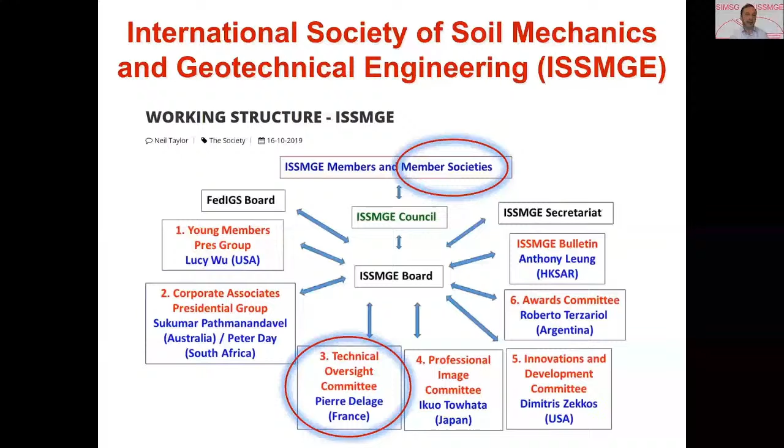This is where I would like to mention that if you visit the website of ISSMGE, you will find a good listing under committees and technical committees. These various committees take part in the technical matters related to soil mechanics and geotechnical engineering.

The Transportation Geotechnics Committee, having a history of just about two decades or so, was established as an applications committee. Because of that, it deals a lot with applications of geotechnical engineering in transportation fields.

As part of the technical composition, the members come from many different member societies, a total of 31 countries, about 80 members listed and suggested by these countries. So we cover a lot of member societies. As you can see in this pie chart, the 80 members come from various parts of the world, with 24 members coming from the Asia region, where India belongs.

These are all the countries listed here, including India, where we actually have 24 members from 8 countries. In India, we have Professor Shahu from IIT Delhi, Mr. Ravi Sundaram from Cengrs, Dr. Vasant Havanagi from CRRI, and several other friends on the TC202 committee representing transportation geotechnics.

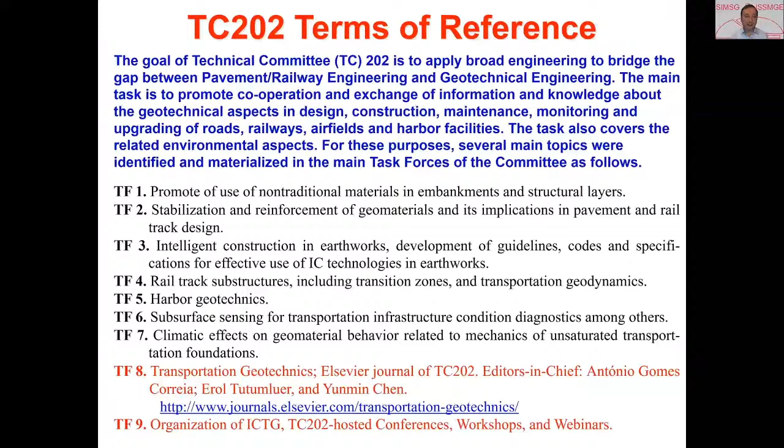That is a lot of the activities that our committee does in terms of hosting conferences, doing workshops and symposia, as well as webinars, and especially a dedicated ISSMGE conference for our technical committee 202, which you will see is the International Conference on Transportation Geotechnics.

Here is the cover page picture of our journal called Transportation Geotechnics. It was certainly a new journal when, in 2014, my very first year as chairperson of the committee, we started with the first issue in that first quarter of 2014.

In addition to myself, Professor Antonio Gomes Correia from Portugal and Professor Yunmin Chen from China are co-editors-in-chief of this journal. Now, since 2019, the journal is in the Science Citation Index, and we expect to receive your original articles to be published in this journal.

The 9th item I mentioned is our International Conference on Transportation Geotechnics. Associated with that, ISSMGE has given us a named lecture series to select the most prominent speakers to give Proctor lectures. The very first Proctor lecture was delivered by Professor Buddhima Indraratna from University of Wollongong.

Now he's with University of Technology Sydney. The second lecture was delivered by our own Professor Antonio Gomes Correia, our past chair, who organized and hosted the 3rd International Conference on Transportation Geotechnics in Portugal in 2016.

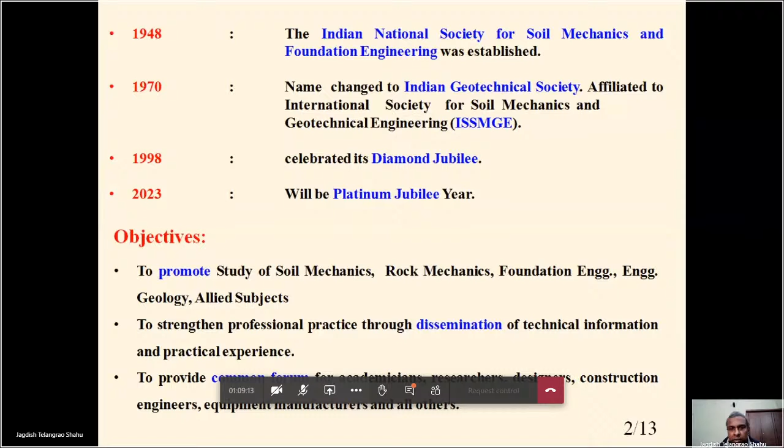If you see the membership, various categories of membership exist, but the most common is the life membership. Presently we are one of the largest societies as far as numbers are concerned. This number has increased to more than 5,000 members, and these are all mostly life members. Our membership fee ranges from 8,000 to 12,000 rupees, depending upon the age. With that, we get a lot of benefits.

For example, in conferences, if you attend, you will get a concession, and there are many other benefits which I will highlight soon. We have local chapters spread all over the country, and through these local chapters we organize conferences, seminars, symposiums, workshops and other things. Presently we have not less than 48 local chapters.

We organize the Indian Young Geotechnical Engineers Conference, where students and PhD scholars participate in masses, held once every 2 years. In this conference, placement opportunities are also presented, and best paper awards are given. If you get a best paper award, it becomes a great highlight of your biodata.

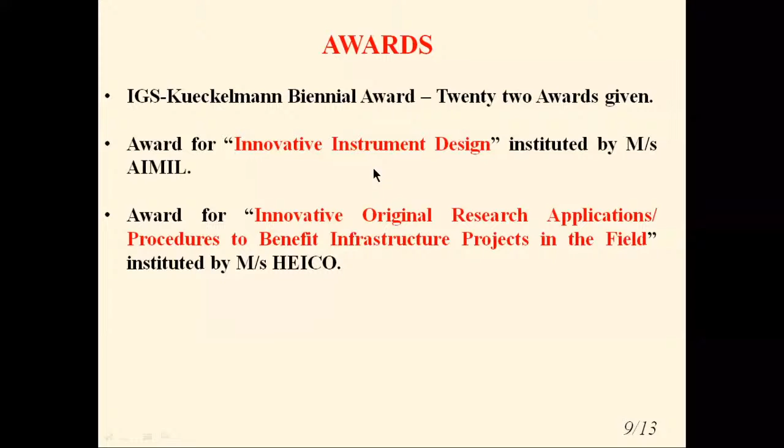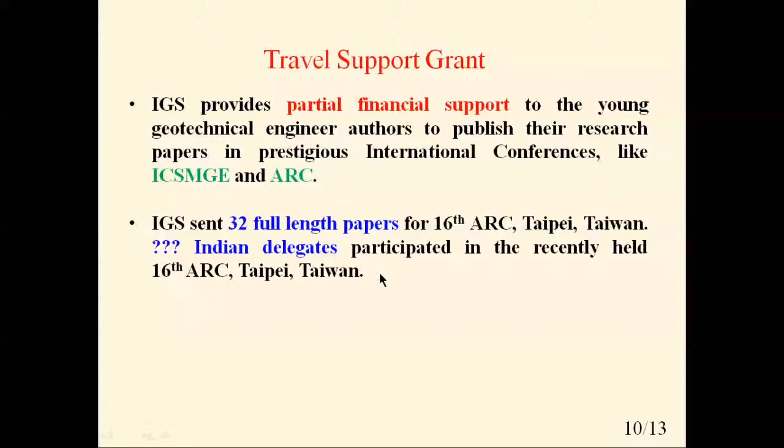Besides that, IGS also gives travel support grants to young geotechnical engineers to publish their research papers in prestigious international conferences like ICSMGE and ARC. Recently there was the 16th ARC conference, and we had sent 32 full-length papers, and I think more than 32 Indian delegates participated in the conference. Besides that, we also have a prestigious IGS annual lecture which is delivered every year.

Going forward, IGS now has a vibrant web portal. We have instituted an online voting system and an online membership drive also. You can just go to our website - type Indian Geotechnical Society, Delhi, and you will get the URL. You can click and go there, fill up the form, and get the online membership very easily. We have a student membership category also, and student chapters also. Several student chapters were recently formed.

Thank you, I'm stopping this presentation now and coming back. So with that, I wish all the best and dissemination of knowledge to the delegates during the next days from 1st to 5th December. Thank you very much.

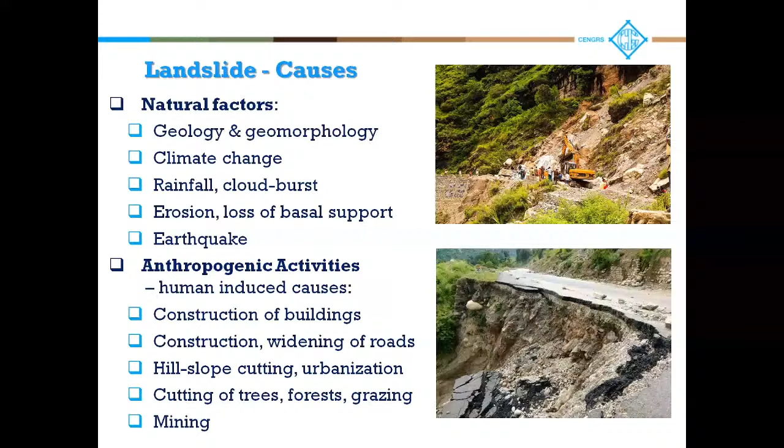As far as human-induced causes are concerned, these include construction of buildings and roads, hill slope cutting, urbanization, cutting of trees and forests. Even grazing can sometimes cause landslides because if animals graze in an uncontrolled way, eating the grass cover, it leads to erosion. And then, of course, there's mining.

Let us see the impact of landslides on society. There is economic decline and losses. It causes blockage of highways and rail tracks. This could result in loss of connectivity to higher reaches, loss in trade and business, and lack of supplies. The cost of rehabilitation involves major government expenditure, so that is another big impact on society. And there's the decimation and destruction of infrastructure, like damage to roads, railways, communication lines, leisure destinations, buildings, etc.

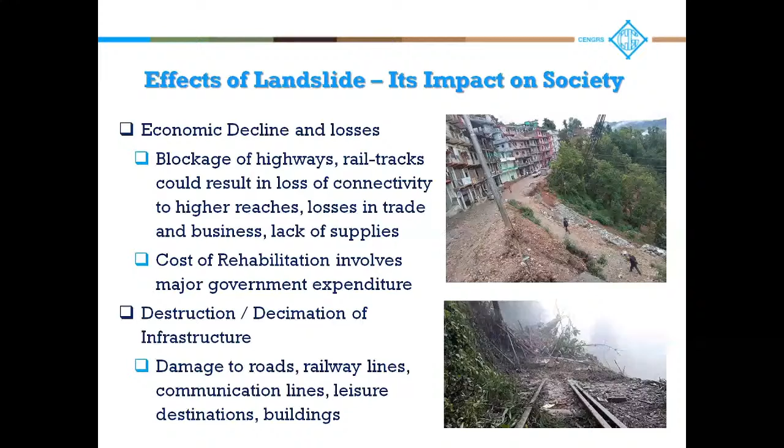Then there's the loss of life, which is the biggest issue. Communities living at the foothills are at risk. The debris could cause death of many people on impact. It impacts river ecosystems, as debris falling into the river can block the natural flow of the river. Waterlogging of upstream areas can occur, and flash floods can happen in downstream areas.

The distress to the population at the upper reaches is a big issue because the areas may get disconnected and relief activities get affected. Of course, the utility and beauty of the landscapes is also affected.

It affects the agriculture and land use. Social impact is there. Erosion of soil and boulders piles up and leaves behind an ugly and unsightly landscape.

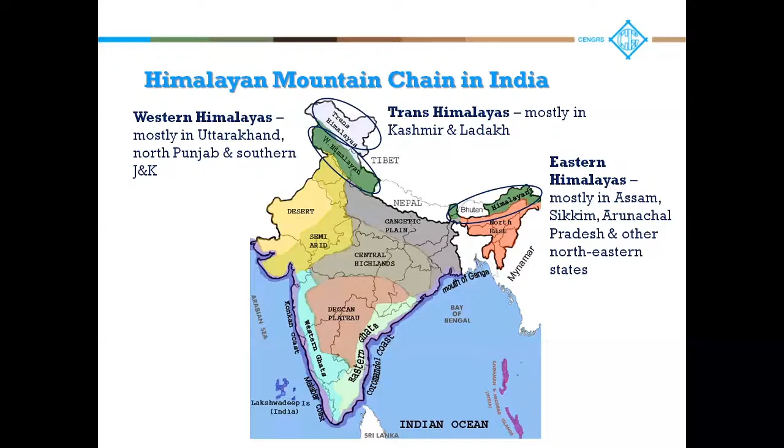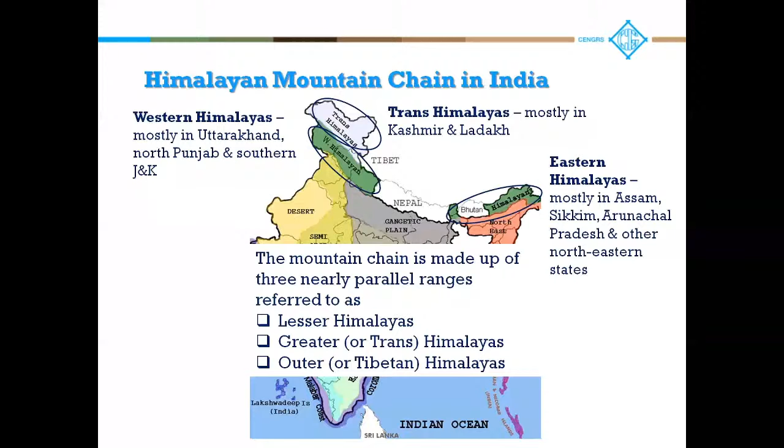So the mountain chain is made up of three nearly parallel ranges, referred to as the Lesser Himalayas, the Greater Himalayas, or the Outer Himalayas.

Let us see the hazards in the Himalayan ecosystem. The avalanches at higher altitudes are a big issue. Then, of course, earthquakes, landslides, flash floods, cloudbursts, soil erosion, forest fires. This you see in the Greater Himalayas as well as the Lesser Himalayas.

This is the river flash flood which caused the destruction of Kedarnath. There is a cloudburst.

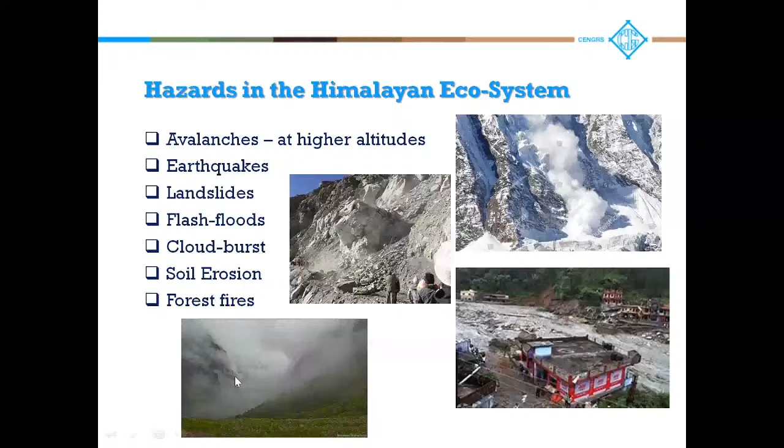The Himalayan mountain chain is one of the most unique geological features on Earth. Its rough topography is a product of a collision between the Indian plate and the Eurasian plate. The tectonic activities in this area make it interesting and challenging for the geotechnical engineer.

During monsoons, as well as seismic events, landslides occur along roads, hilly villages, and towns, causing large-scale devastation and destruction.

The fragile slopes of the Lesser Himalayas are prone to landslides, and an interplay of several forces trigger them. Geotechnical configuration of the rocks and large level variations make the rock mass inherently unstable and vulnerable to movement. Heavy rain and seepage through the jointed mass can play havoc on the stability of the region.

The balance between environmental protection and infrastructure development has always been a dilemma for engineers, sociologists, and town planners.

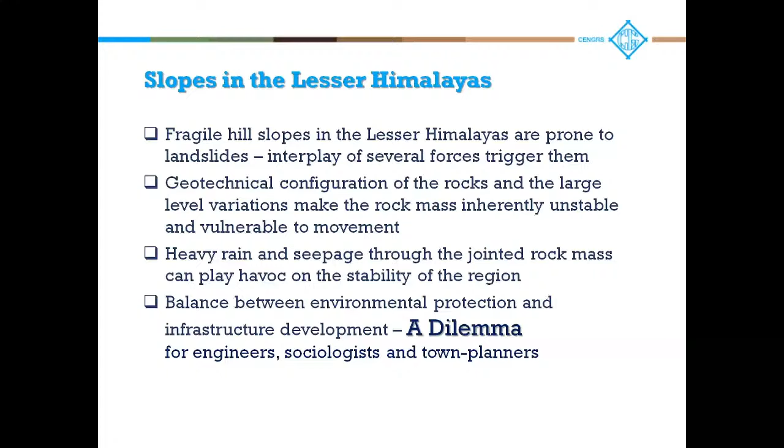There is a need for assessment of slopes in Uttarakhand for restoring environment with sustainable socio-economic development. Geotechnical assessment is a prerequisite.

Several highways in this area are under continual threat of a variety of slope failures. Over several decades, frequent mass movement phenomena have been a major hindrance to ongoing traffic.

Endeavor has been made by several geotechnical engineers and researchers to assess the stability of cut slopes, particularly along highways and roads connecting the various tourist and pilgrim destinations. These studies have, to quite an extent, helped understand the problem, and geotechnical engineers have suggested various remedial measures.

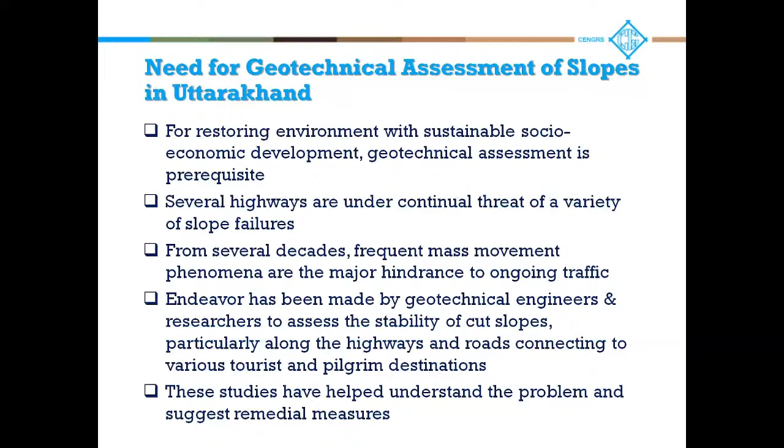Consequences of landslides in the Lesser Himalayas in Uttarakhand are particularly hazardous if they occur along transportation corridors near townships.

Uttarakhand is very well known for its ecological diversity and richness, along with massive tourism and religious activities. Natural hazards like earthquakes, cloudbursts, landslides, floods, lightning, and forest fires are of major concern. The occurrence of any such event is catastrophic, and impacts are manifold, particularly when one event triggers another.

Salient features of the Himalayan landslides: the landslides in the Himalayan region are not of very large scale, usually local failures of shallow depth. Recurring landslides are significantly more common in the Himalayas, particularly in highly fractured and sheared rock mass and soft-hard rock alterations.

Climatic factors become operative when sufficient weathered and disintegrated materials are generated, which are brought down by heavy downpour. Though monsoon rains begin in June, the devastating landslides mostly take place in August and September.

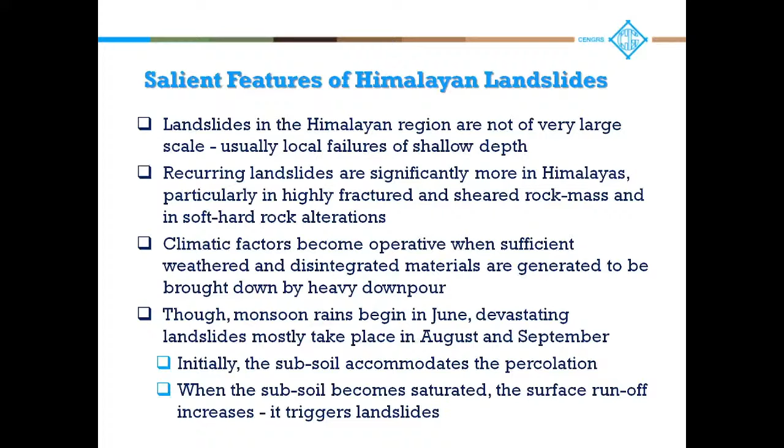Initially, the subsoil accommodates the percolation. When the subsoil becomes saturated, the surface runoff increases and triggers a landslide. The earlier rains weaken the slope-forming materials, while the later rains trigger the landslide.

But cloudbursts are different. They could cause a landslide in the first instance itself due to heavy precipitation. When the fissures and joint planes in the rock dip into the hill relief, that is, you have an unfavorable dip, fractures open up along the river valleys, and this could cause failure. But when the dip of the fissures is favorable, slip rarely occurs.

Most landslides in the Himalayas are triggered by anthropogenic interferences like construction of buildings, roads, dams, etc.

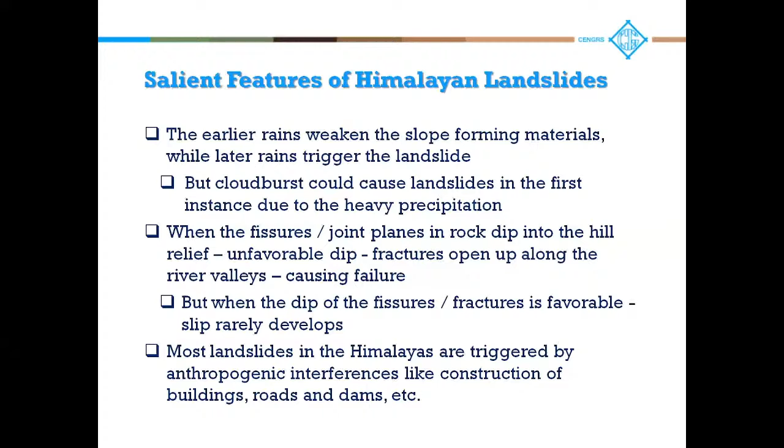I'm now going to talk about a cloudburst that happened in June 2013. This triggered several landslides along the Rudraprayag Badrinath section of NH58. Over 1,000 landslides, major and minor, have been recorded along this alignment after this cloudburst event.

The highway is of distinct importance because of destinations of pilgrim and tourist importance like Badrinath, Hemkund Sahib, Valley of Flowers, and Auli.

Let's understand what's a cloudburst. A cloudburst is an extreme quantum of precipitation within a short period of time. Meteorologists say that rainfall from a cloudburst is usually showered with a fall rate exceeding 100 mm per hour, usually more than 20 mm within a few minutes.

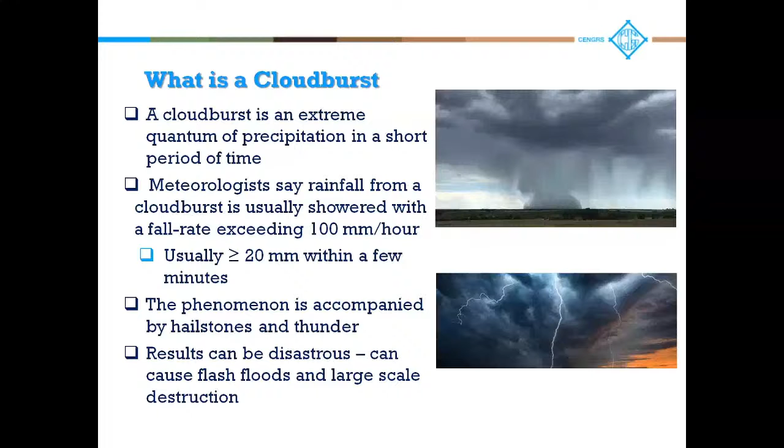This phenomenon is accompanied by hailstones and thunder. Results can be disastrous, causing flash floods and large-scale destruction.

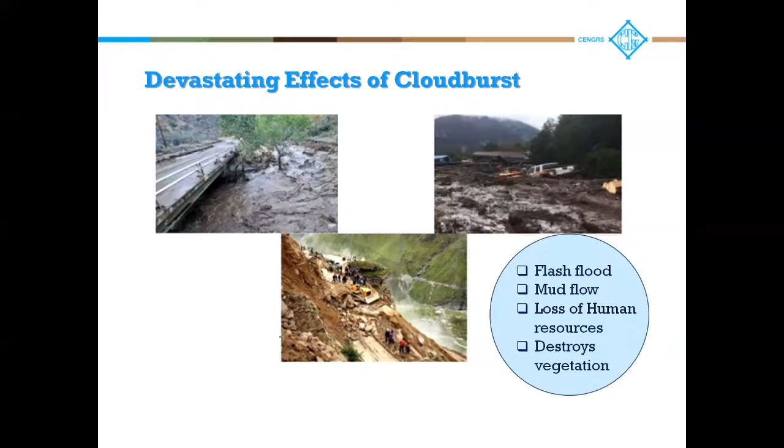So let's see the devastating effects of the cloudburst. You have flash floods, mud flow, loss of human resources. It destroys vegetation to a very large extent.

This study included geotechnical investigation, evaluation of the landslide, and implementing remedial measures at the following locations along NH58: Nandprayag, Maithana, Birahi, Gulabkoti, Helang, Govindghat 2 and 3.

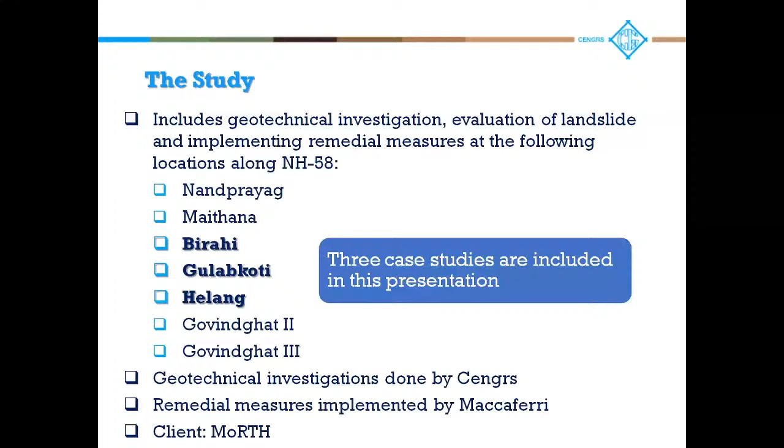This geotechnical investigation project was done by Cengrs, and the remedial measures were implemented by Maccaferri. I acknowledge the contribution of Maccaferri to this work. The client was MoRTH. So in this presentation, I'm presenting three case studies of Birahi, Gulabkoti, and Helang.

The scope covers the landslide area, geotechnical investigation, including boreholes and seismic refraction tests, then geotechnical characterization of the landslides, and engineering solutions were developed to mitigate the distress and ensure safety of the highway. The main contribution in this has been from Maccaferri.

So I'll be talking about Birahi, Gulabkoti, and Helang. The geological setting of this area belongs to the Lesser Himalayas, the central crystalline group. It lies in a tectonic fore-deep, sandwiched between the North Almora thrust and the main central thrust. It has a rugged topography, highly jointed, fractured quartzite, dolostones, and mylonites.

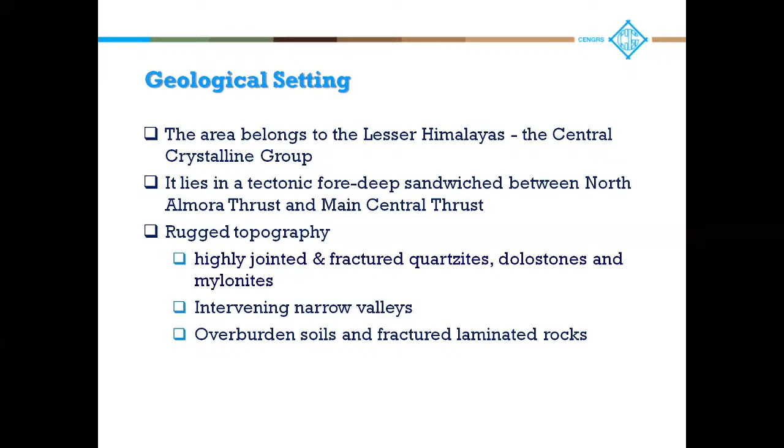There are intervening narrow valleys, overburdened soils, and fractured laminated rocks.

Rock exposed at Birahi comprises highly jointed and fractured quartzitic schist of the Garhwal Formation. The landslide in this vicinity is near the Birahi fault. This makes it vulnerable to seismic activity.

At Gulabkoti, rocks exposed include the Pipalkothi Formation and the Gulabkothi Formation, highly jointed and fractured quartzites, dolostones, mylonites. Rockfall is prevalent in this area, and it is a big problem here.

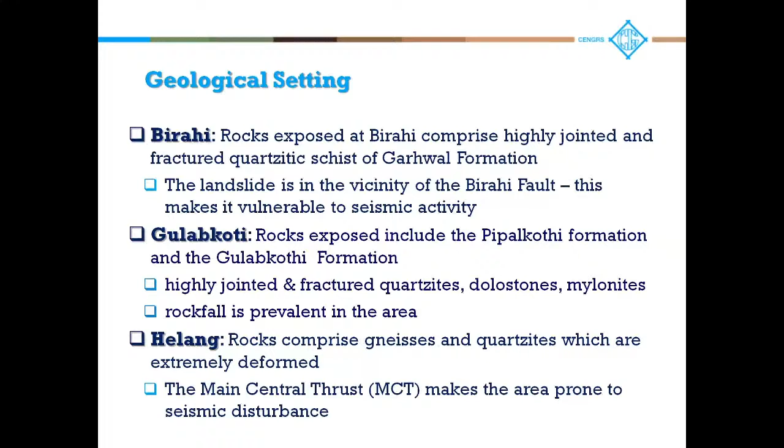At Helang, rocks comprise gneisses and quartzites which are extremely deformed. The main central thrust, MCT, makes the area prone to seismic disturbance.

So I start with the first case study, landslide at Birahi, which has unfavorably dipping rock. The site conditions at Birahi...

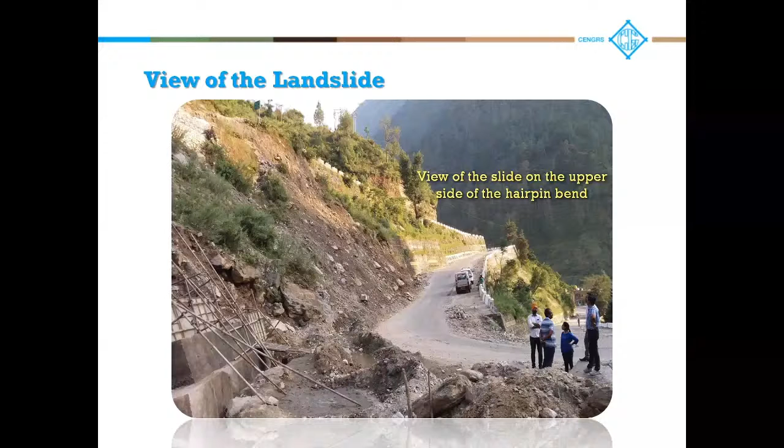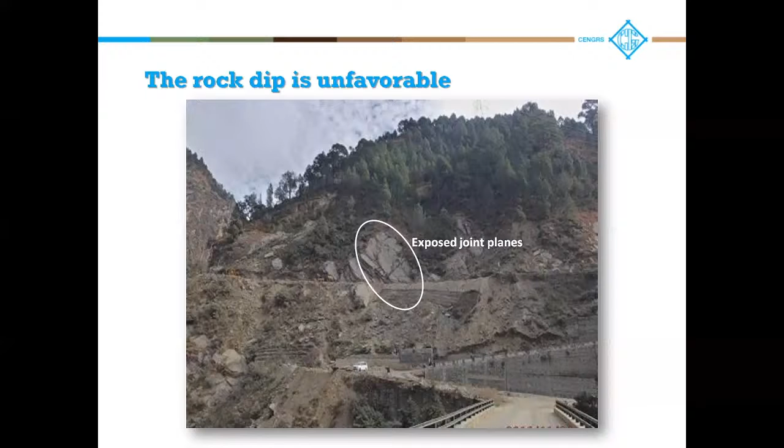This is a view of the landslide on the upper side of the hairpin bend. The rock dip is unfavorable. The rock joints are exposed, joint planes are visible here. So you can see the dip of the rocks here.

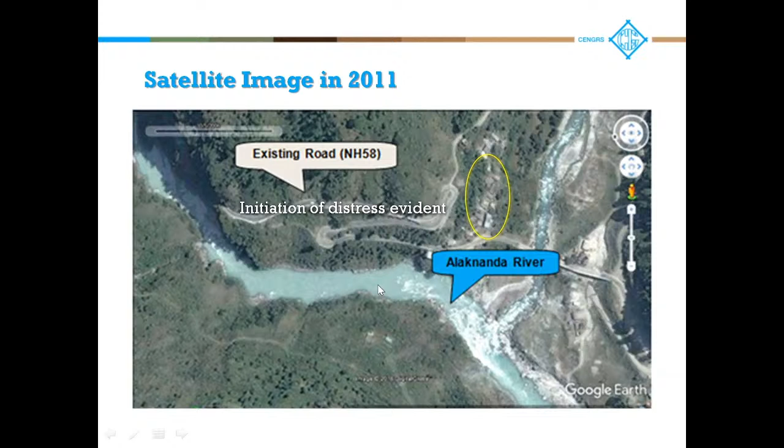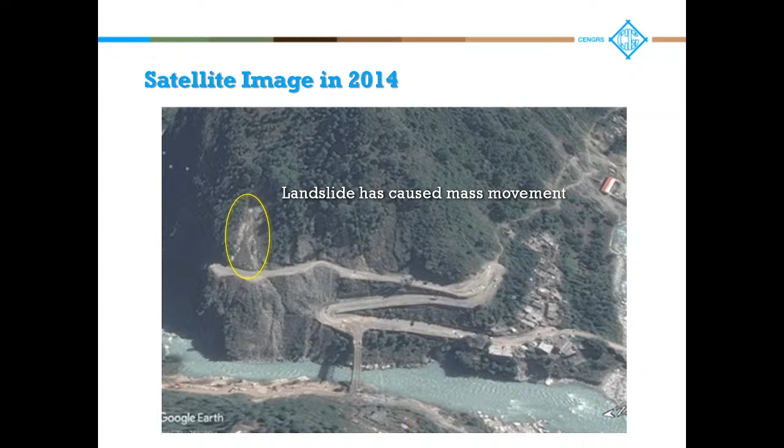The schematic of the landslide shows the unfavorable dips. The cloudburst resulted in buildup of pore water pressure behind the Gabion walls. Movement of rock mass along the weak planes occurred, resulting in increased instability of the area.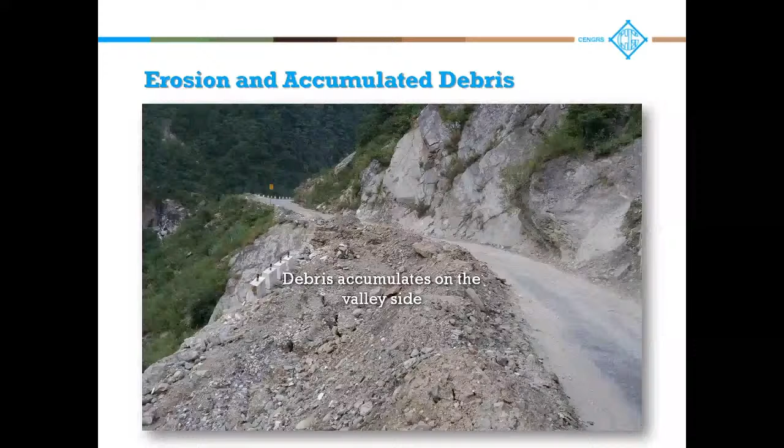So let us see the engineering solution which was developed here. The geotechnical investigation with deep boreholes and geophysical tests were done in conjunction with geological study to evaluate the landslide, its lateral extent, and severity of the problem.

Seismic refraction tests were used effectively to characterize the ground in the landslide zone. The assessment has been used to work out engineering solutions for long-term stability of the distress zone, including drainage planning, erosion control, and reinforcement on the valley side.

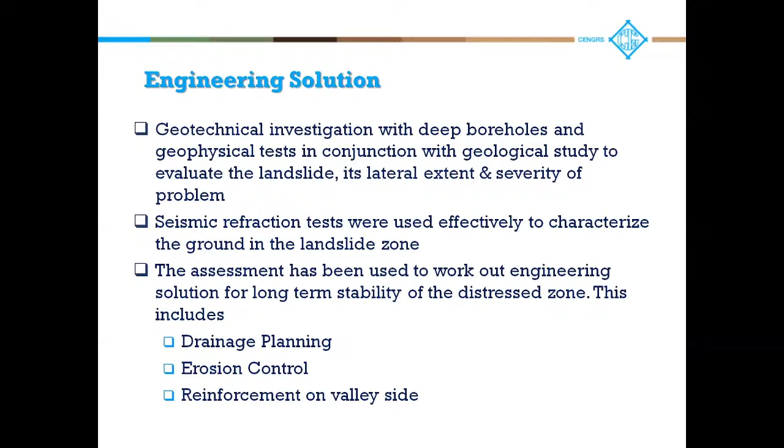So these are the various tests which were done here: 2 boreholes and 1 seismic refraction test were conducted at the lower level, and similarly 2 boreholes and 1 seismic refraction test at the upper road level.

So these are the boreholes in progress, with the drilling equipment on the lower level and the higher level.

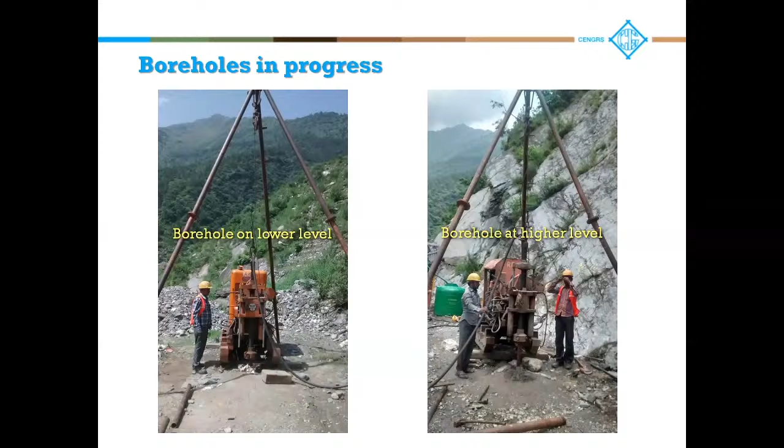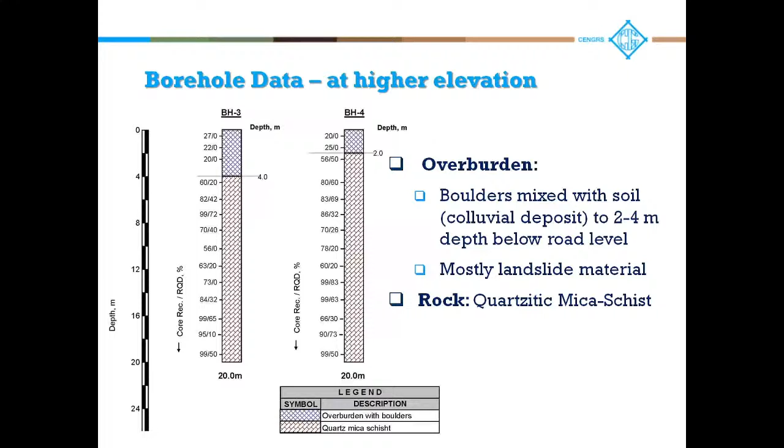So let us look at the borehole data at the higher elevation. The overburden is a mix of soil and boulders, only to about 2 to 4 meter depth, and below that you get the rock, which is quartzitic mica schist. However, at the lower elevation, the slide material extends to 11 to 12.5 meter depth, below which you get the landslide rock.

So you can see the seismic refraction tests in progress. The geophones along this line, and this is the data acquisition system.

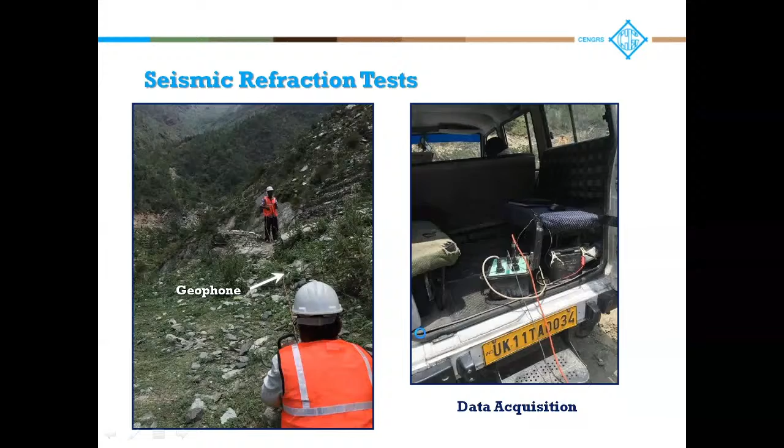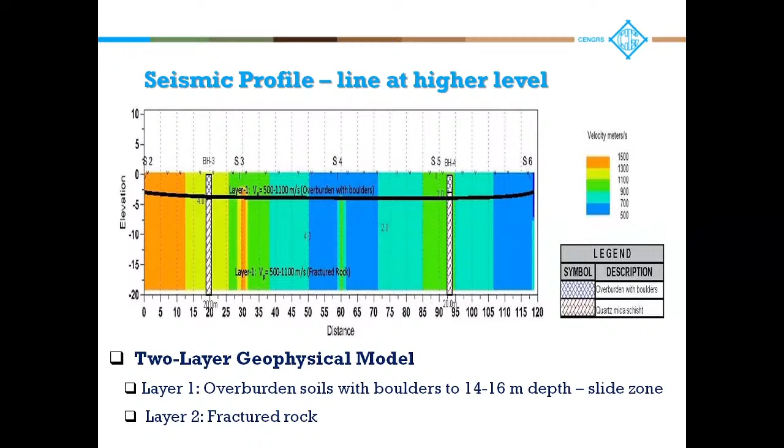So the seismic line at higher level showed a two-layer geophysical model: the overburden and slide materials, and then the fractured rock. The line at the lower level had the overburden and then the fractured rock again.

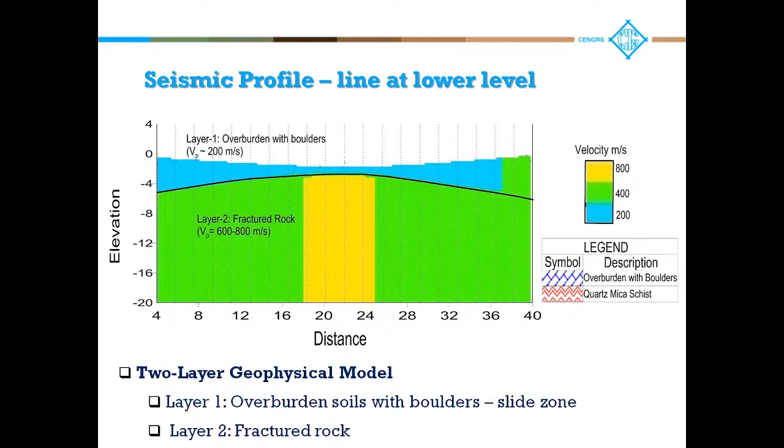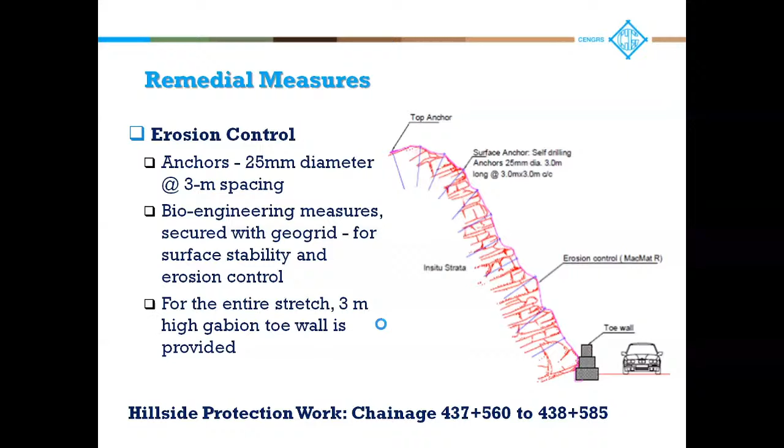The reinforcement on the valley side included a reinforced earth wall.

My God, I'm sorry, it got disconnected again.

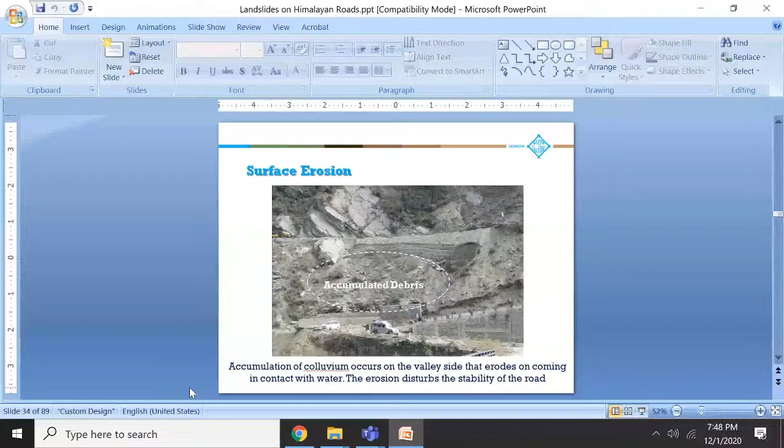Are you able to see this?

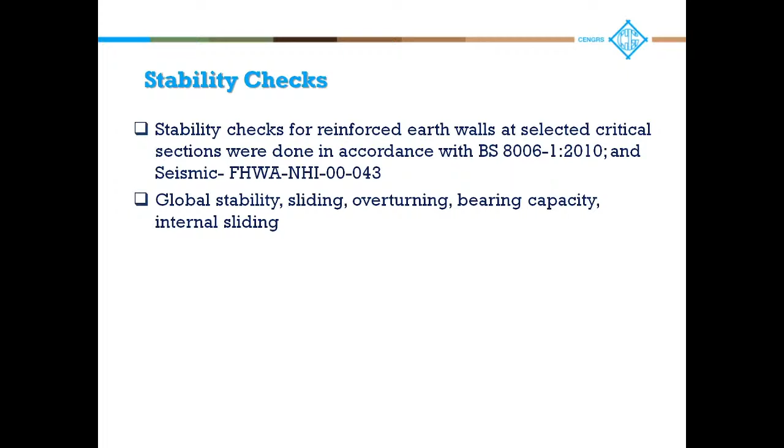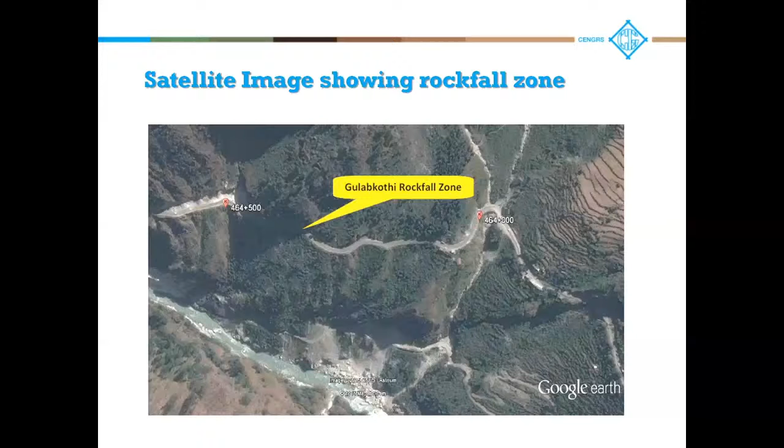The geotechnical investigation in Gulabkothi included just one borehole and one seismic refraction test, a geotechnical characterization of the landslide and the rockfall zone, and engineering solutions to mitigate distress and ensure safety of the highway.

Another panoramic view of the area. Rockfall was seen at several locations. At several places, the rock was overhanging towards the road. The destabilization forces causing triggering failure include vertical joints, weak planes, unfavorable dip of rock, improper drainage, and of course seismic forces.

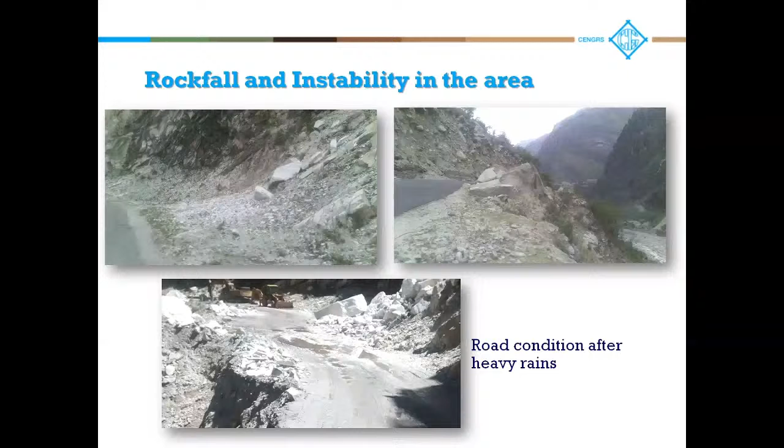So you can see how disturbed the area is and how much rockfall has occurred, and the road condition after heavy rains.

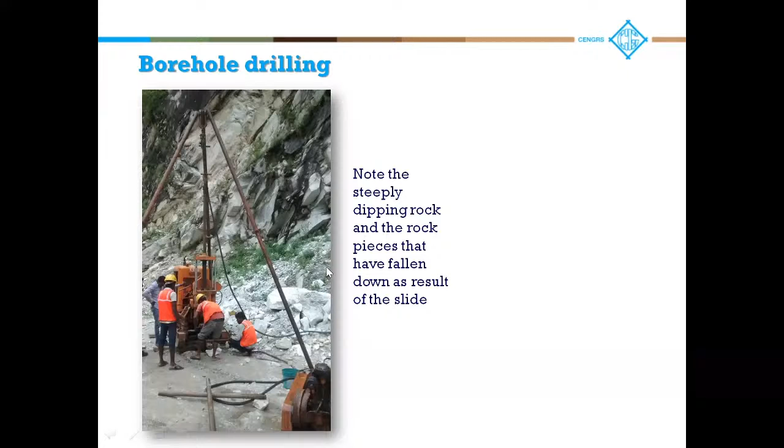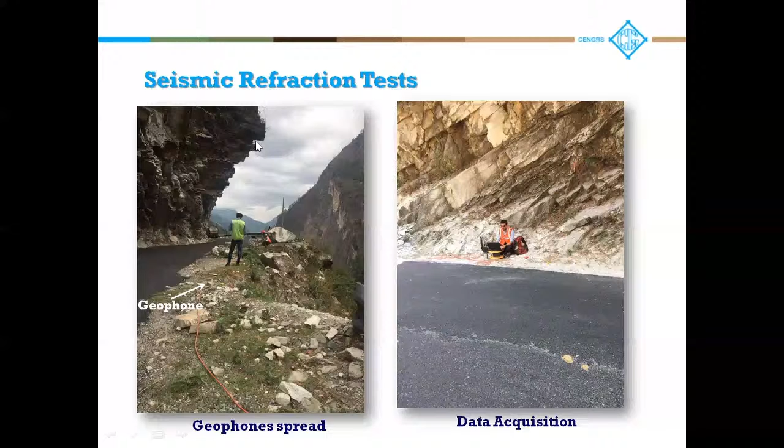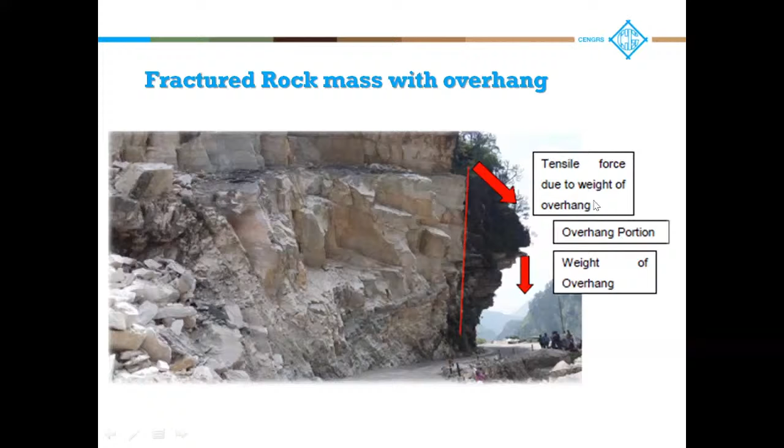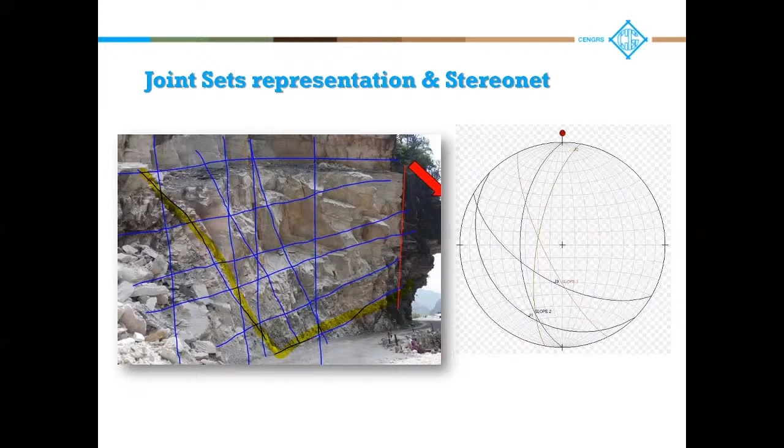So joint representation was done on a stereo net. You can see 3 sets of joints here, and then the slopes. These are the joint sets observed.

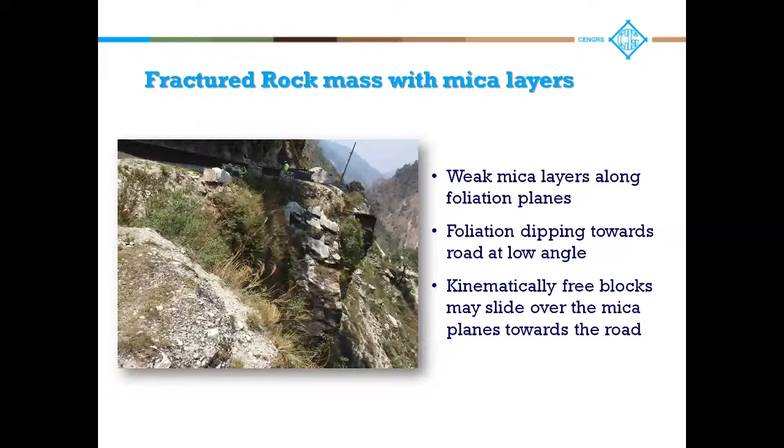You can see the fractured rock with mica layers. There are weak mica layers along the foliation planes, and the foliation dips towards the road at a low angle. There's a possibility that free blocks may slide over the mica towards the road, which could cause a big disaster.

The other issue was roots of trees on the slopes which widen the joints, thus causing instability. The blocks of rock may slide along the joints because of the influence of the roots.

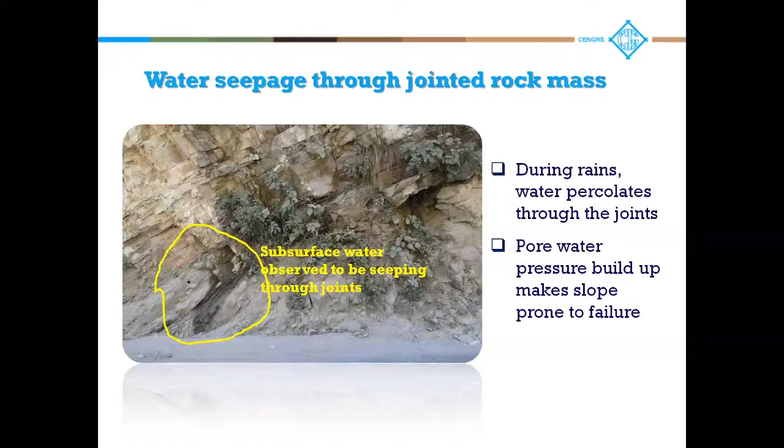Water seepage through the jointed rock mass. You can see the water seeping through this. So during the rains, water percolates through the joints and pore water pressure builds up, making the slope prone to failure.

Seismic forces: since the area lies in zone 5, it is seismically active. Design earthquake magnitude is 7.5 on the Richter scale. It also receives heavy rainfall, and seismic force is a major destabilizing force. So Keefer suggested that an earthquake magnitude of 4 is sufficient to trigger rockfall where the rock mass has unfavorable dip.

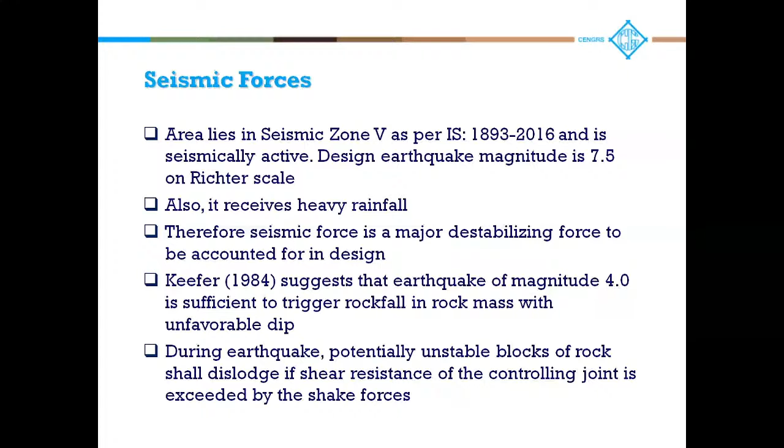So during an earthquake, potentially unstable rock blocks will dislodge if the shear resistance of the controlling joint is exceeded by the shake forces. In such an area, earthquake magnitude of 4 is very common.

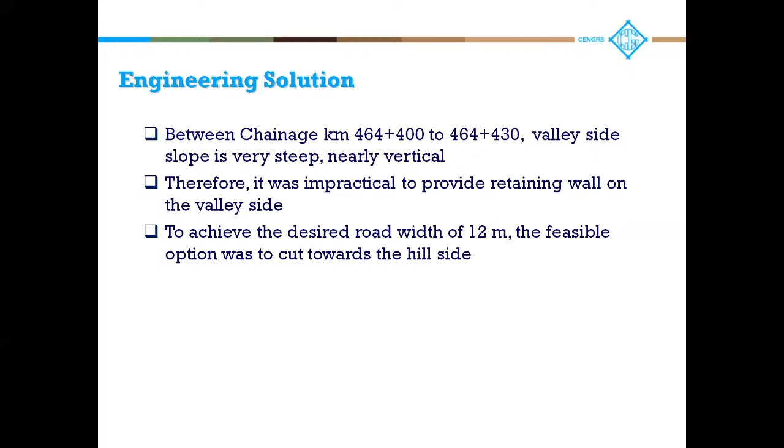So here, what is the engineering solution? Between chainage 464 plus 400 and 430, the valley slope was very steep, almost vertical.

Therefore, it was impractical to provide a retaining wall on the valley side. So to achieve the desired road width of 12 meters, the feasible option was to cut towards the hillside.

Further beyond this location, up to 464 plus 400, a reinforced earth wall was provided on the valley side to ensure the road width.

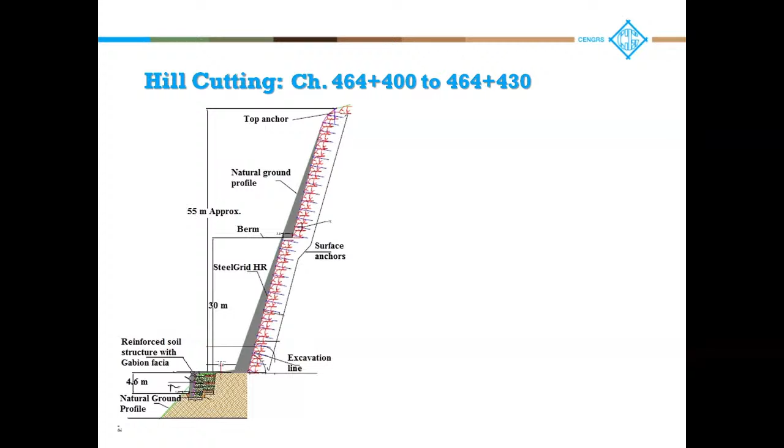You can see the hill cutting was done on the valley, on one portion. Rockfall was arrested by having a secured system here: rock bolts, that is nails with wire mesh, comprised of steel bars to stabilize the slope, and a mesh for blocking the rock from falling.

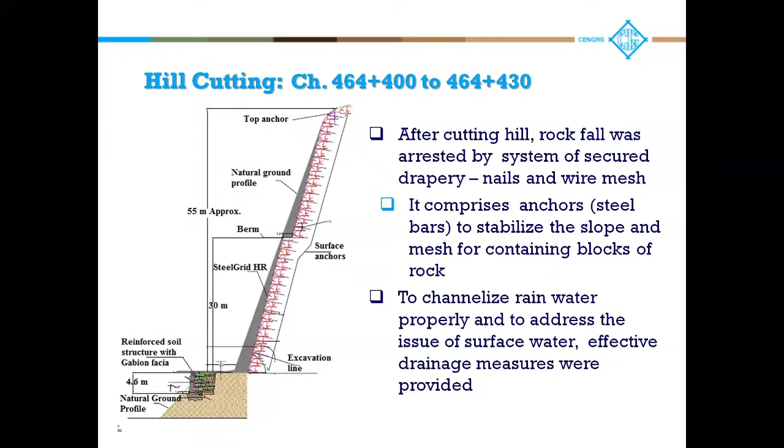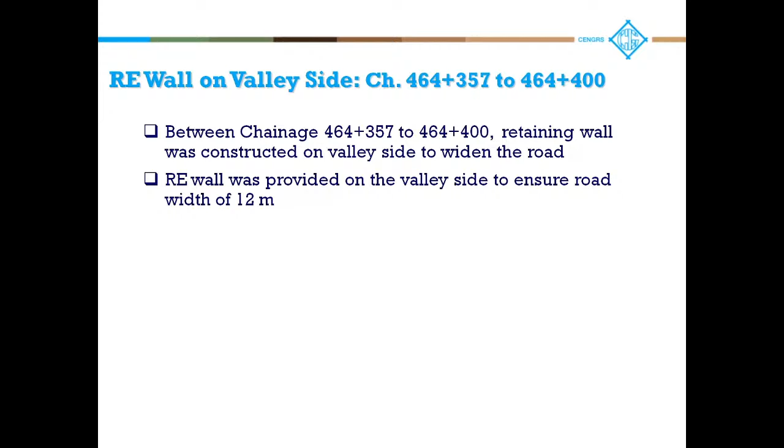To channelize the rainwater properly and to address the issue of surface water, effective drainage measures were provided. The reinforcement RE wall on the valley side was provided beyond the further area. The RE wall was designed for the anticipated traffic and seismic forces, so that you have a 12-meter width of road, which was a requirement.

So you can see here what was done. The drainage measures which were taken for the slope, and then we had shotcreting done with steel grid and anchors all around the route.

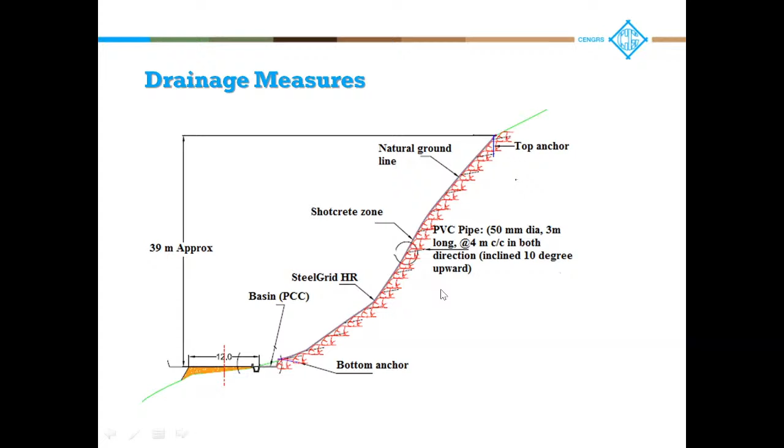The last case I am presenting here is the landslide at Helang. This also had several problems: unfavorable dipping of rock, gabion wall damage, and erosion of the river toe.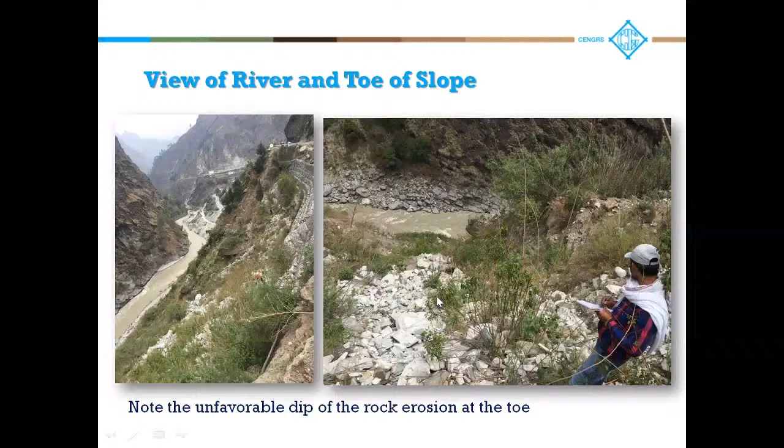This is the Alaknanda River again. Here you can see the damage, the erosion which has taken place, and the unfavorable dips at the toe of the river.

The landslide is located on the valley side of the highway. High velocity and current of the Alaknanda river continuously erodes the toe towards the valley side. This worsens the overall stability of the area, and conditions are favorable for the slide.

The main central thrust passes through this area and it makes the region seismically active.

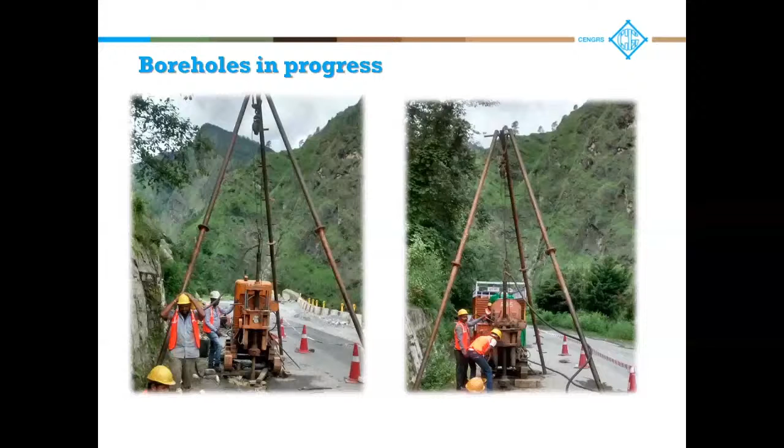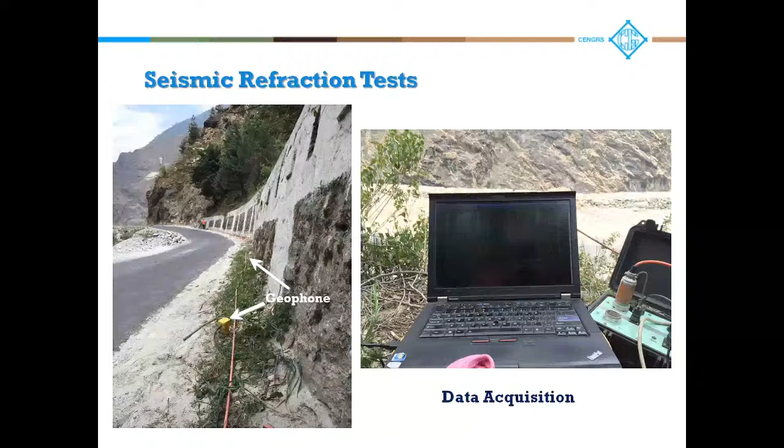The seismic refraction tests were done. You can see the data acquisition being done for the seismic refraction test. So the seismic profile, we developed a 3-layer model: overburden soils and boulders to 14 to 16 meter depth, then fractured rock, and then hard rock.

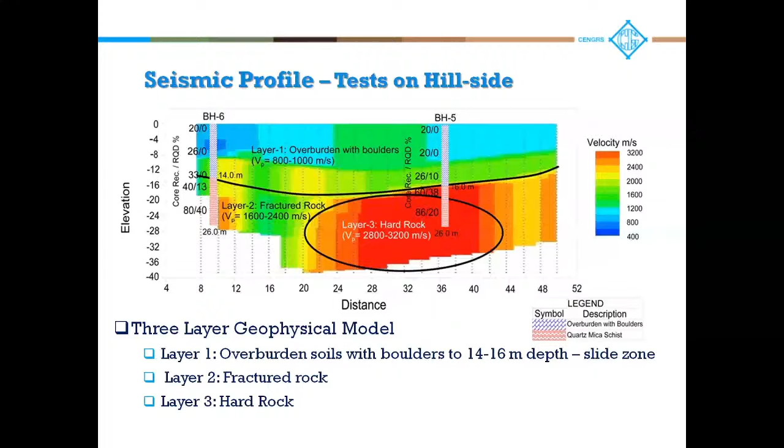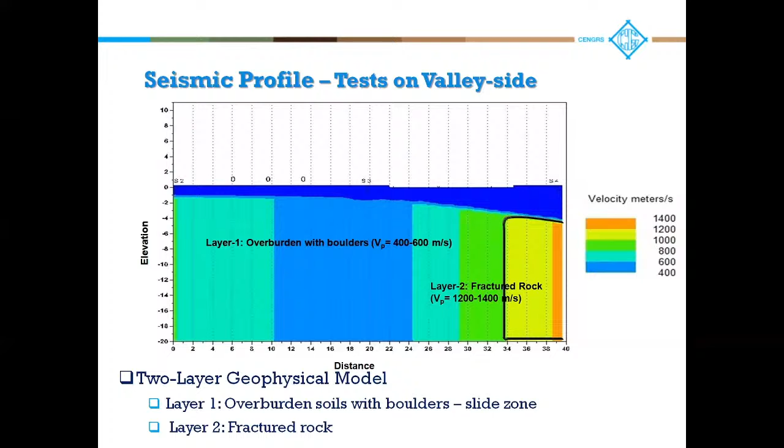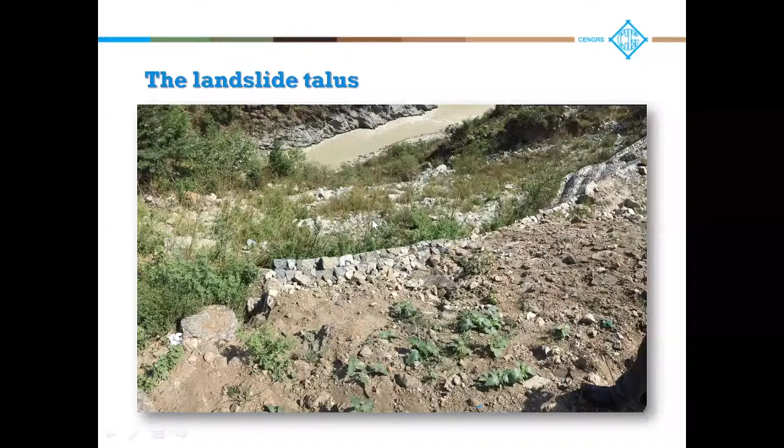So let's look at the remedial measures. The drainage was improved on the hillside and the valley side to channelize the water effectively to limit buildup of pore water pressure.

Strategically located culverts, catch water drains, and chute drains were provided. Reinforced soil earth walls replaced the gabion walls on the valley side with a properly designed reinforced earth wall. Then an apron was provided for the toe wall.

The gabion wall on the toe shall protect the exposed toe from erosion control. So a gabion mattress was provided so as to protect against scouring.

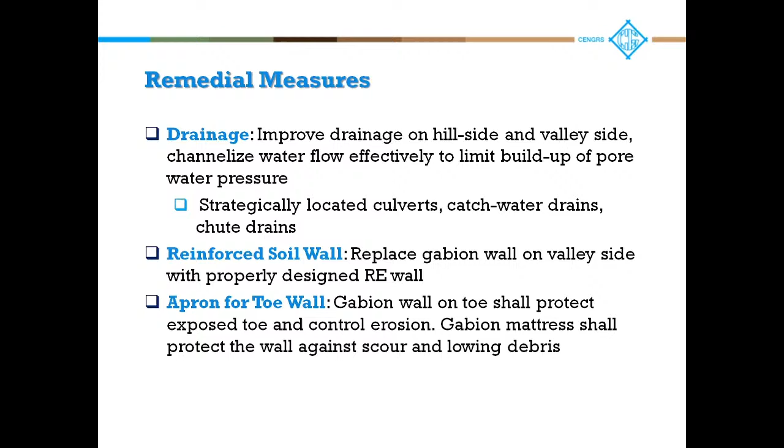With this, I conclude this presentation.

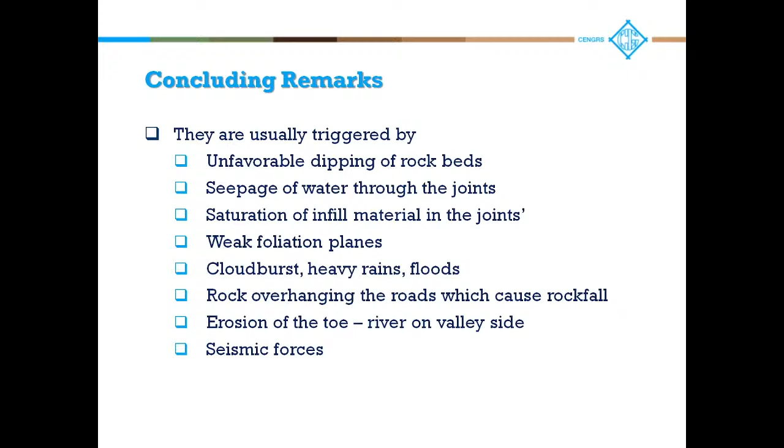Geotechnical investigation with deep boreholes and geophysical tests, in conjunction with the geological study, can effectively evaluate the landslide, its lateral extent, and the severity of the problem. This assessment has been used to work out engineering solutions for long-term stability of the distress zone.

A mix of soil and rock, high seismicity, rainfall, and the need for striking an ecological balance calls for site-specific engineering solutions. Most important is striking that balance in ecology.

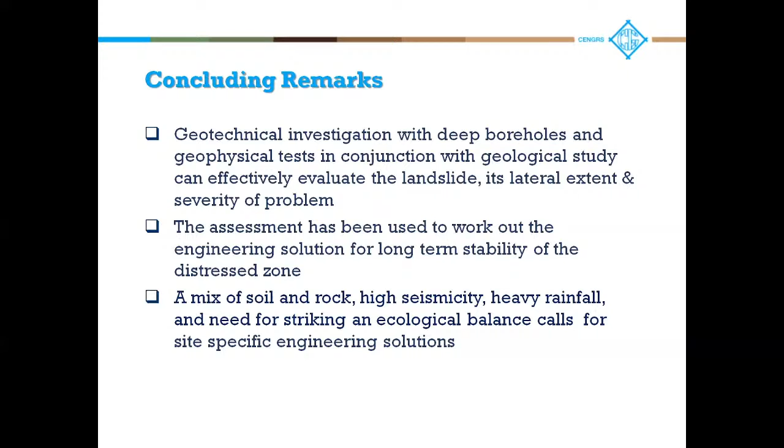So I presented these three cases of Berahi, Gulabkoti, and Helang. I will not go into the details.

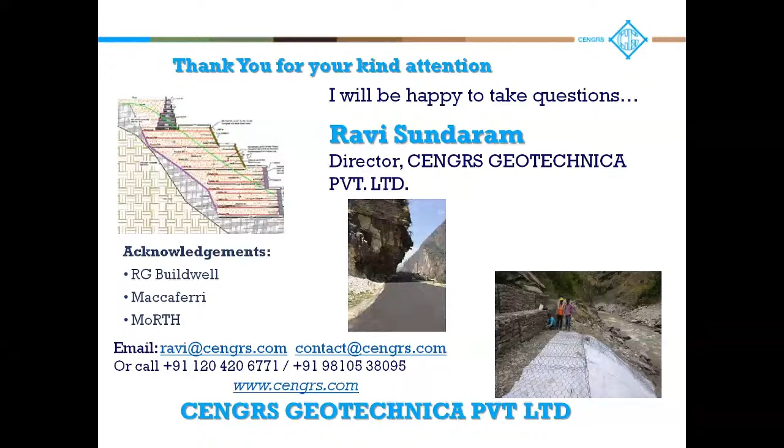Thank you very much. I acknowledge RG Buildwell, Maccaferri, and MoRTH, who have been part of this study. We had done the geotechnical investigation. I'll be very happy to take questions. Thank you. With this, I close this presentation.

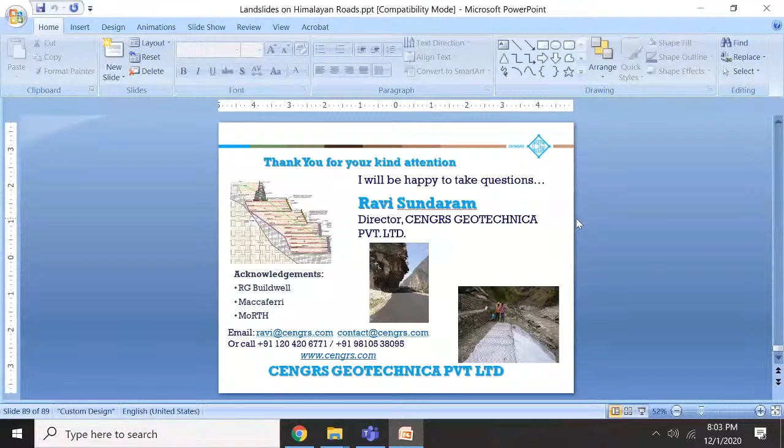I think it was an excellent presentation, Mr. Ravi Sundaram. You have covered all the investigations, subsoil investigations, what type of tests and investigations we have to do in a hilly area and how to stabilize the slopes. Even the uphill slopes you have covered with anchors, drapery and rockfall control, and downhill the Gabion walls and the RE walls. It was a fantastic presentation, and I think all the people must have loved it.

Students must have got very good knowledge out of it. It's a very typical hilly area, you have covered 3 places. So one question I have in mind: for the investigations, you have carried out seismic refraction test and then subsoil investigation. So in my mind it was going, can we do it alone? Why have you done both investigations? Is it to confirm the profiles from the seismic and the subsoil data? That's why you are doing the borehole, because doing a borehole in a hilly area is difficult. Can we go just with the seismic refraction, come out with the profile, and then provide all the remedial measures and do the analysis?